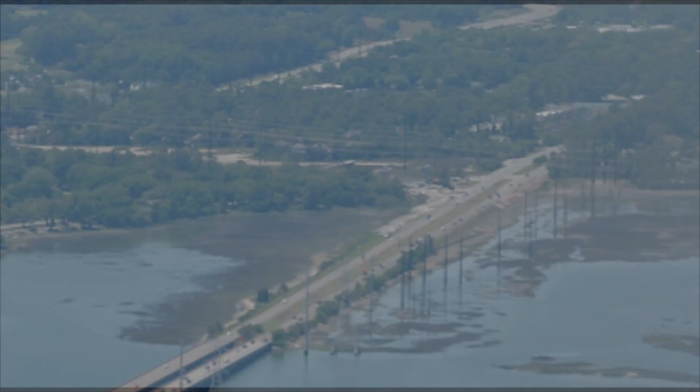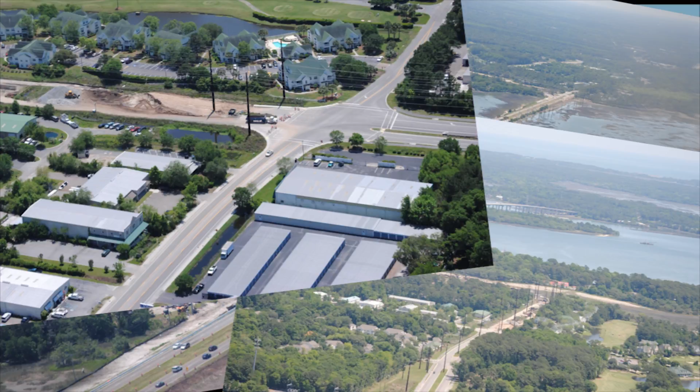After nearly 15 years and thousands of hours of planning and construction, the gateway to and from Hilton Head Island officially has a new look. The complex flyover bridge connecting Bluffton Parkway and Highway 278, accessible July 2016, could be classified as one of Beaufort County's most anticipated transportation improvements. The two goals in mind for everyone involved: safety and ease of access.

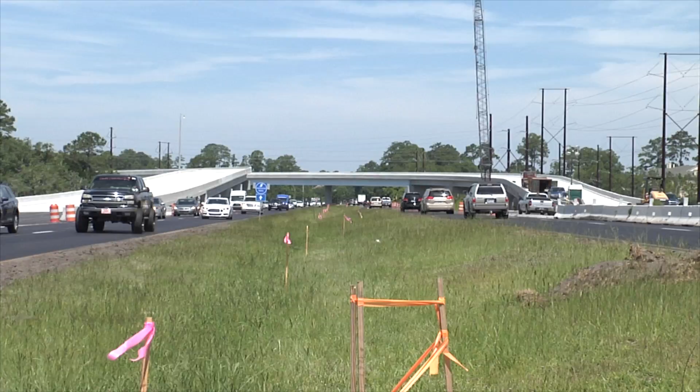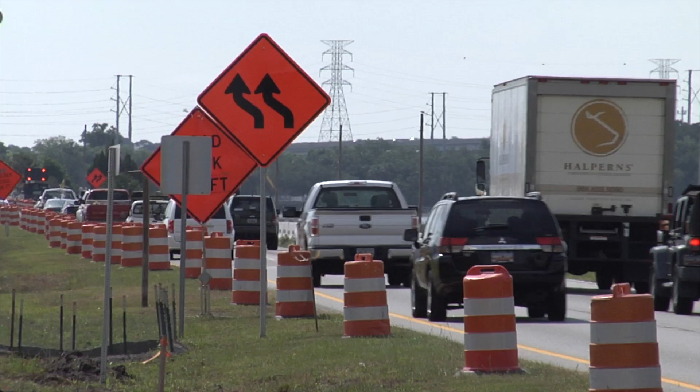It's been a long time coming. It's beneficial for the entire county because it is taking a lot of load off of 278. For the longest time, US 278 in this section of the corridor, anytime there was heavy congestion or a vehicle crash, traffic came to a stop. Every afternoon, traffic coming off Island backs up from the Moss Creek signal, and a lot of that traffic is wanting to turn left to get to the Bluffton Parkway. That congestion will all now be able to use Bluffton Parkway.

It's always exciting to see a big project finished. The traveling public sees construction on the roadway, the orange cone zones that everybody calls them. They see that for a couple of years, maybe 3 years. But really, there's just been maybe a decade or more of planning and studies and trying to line up funding. Funding that could not have happened without Beaufort County taxpayers.

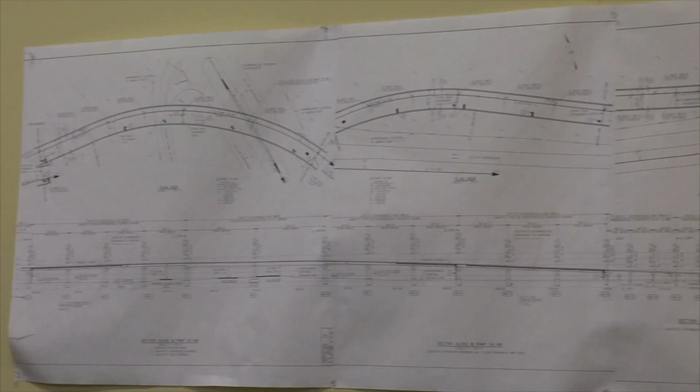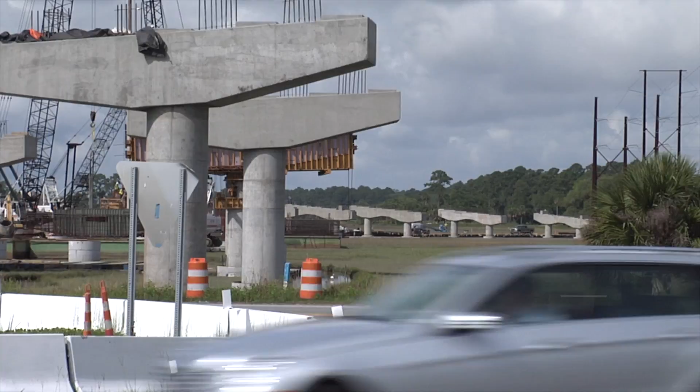A sales tax referendum was approved in 2006, setting aside $15 million for the project, which was later matched by the state and federal governments. We also put in road impact fees, and then there was some cost sharing on some additional asphalt repaving that we worked out with SCDOT. The sales tax referendum in 2006 really gave us the funding to be able to move the project into construction, into a viable project, and now we're looking at that completion.

You can debate the merits all day long, but the counties really have the ability to pass these sales tax programs. They have the ability to identify projects that are important to them, and they have the ability to make these projects a reality. It's the residents of the county taking their fate into their own hands to a certain degree.

The final contract value with R.R. Dawson Bridge Company is just over $38 million, about $7 million under the $45 million budget, and just shy of $1.5 million more than the original contract. The county plans to use the unused funds on other sales tax projects.

The project is a unique one as a whole, the first reason being the structure itself. The first thing that would come to mind or someone would see is the shape of the bridge. It actually looks like an S, if you will, from the air. A few bridges have single curves in them, but relatively few bridges have reverse curves in them, and so that makes it fairly unique.

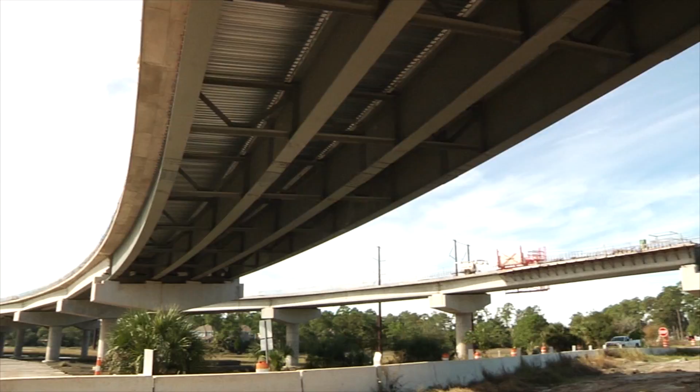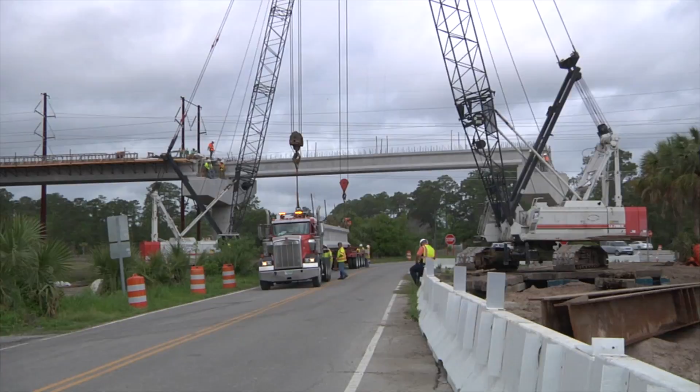There's 4 different kind of foundation systems on the bridge. There's 4 different substructures on the bridge, and then there's 3 different superstructures on the bridge. And when I say superstructure, I mean bridge deck, the riding surface. We initially knew that the goal was to extend the existing Bluffton Parkway and somehow tie it into US 278. As you're heading eastbound, coming off of a 5-lane road and then coming onto one continuous bridge structure, and then the term is bifurcating that bridge structure into the 2 ramps. Extremely difficult from a geotechnical as well as a bridge design standpoint.

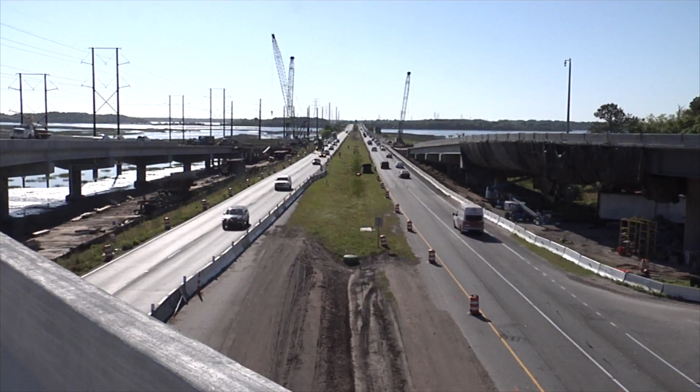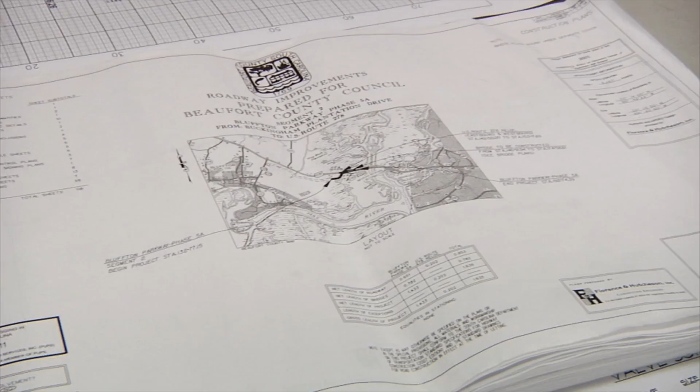It was also installed in an existing utility corridor, something that in the early stages posed a challenge to move the project along. Prior to construction, design teams came up with 4 different alignment blueprints, eventually choosing the one that you see today. It probably took between 2 and 2.5 years just to come to an agreement on exactly where the alignment would go and how Santee Cooper would relocate their utilities. Not only the Santee Cooper utilities, but all of the other adjacent type utilities, the water and the sewer and the phone that were all within Santee Cooper's easement. All those utilities had to be relocated prior to even going to construction.

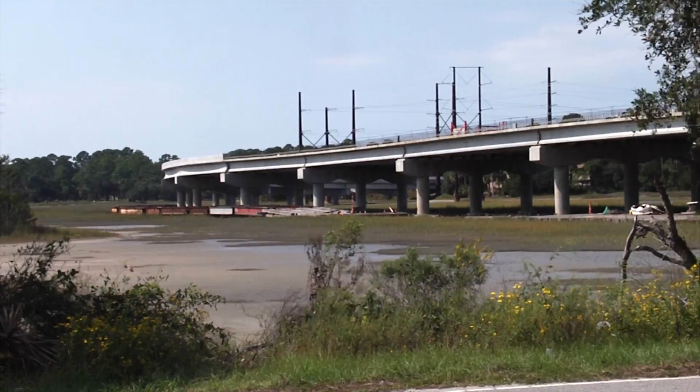But the biggest challenge of all was building through an infrastructure area critical to Beaufort County, the marsh. Because the marsh, because Port Royal Sound is so pristine, this is one of the most pristine wetlands in the state of South Carolina, and the oyster beds being really close. You've got to do a lot of things to protect the nature of the marsh, the nature of Port Royal Sound. You don't want a lot of contaminants, sedimentation getting into the marsh.

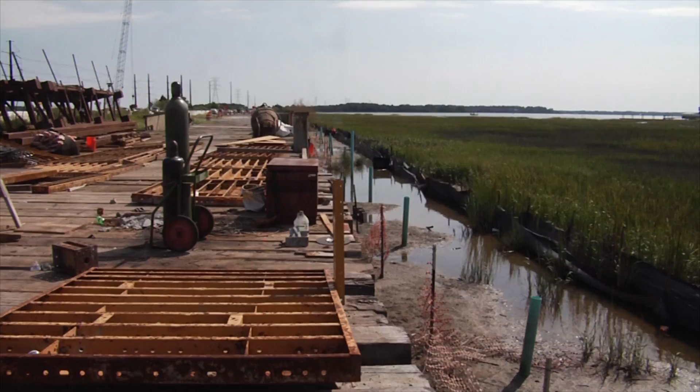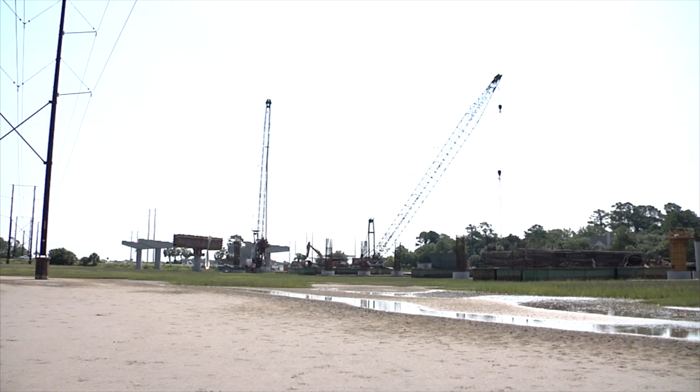The process started with studies of how a structure of this magnitude would impact the marsh. Project managers worked closely with the U.S. Army Corps of Engineers, Ocean and Coastal Resource Management, and South Carolina's Department of Health and Environmental Control to acquire a special permit allowing the bridge to come through the sound.

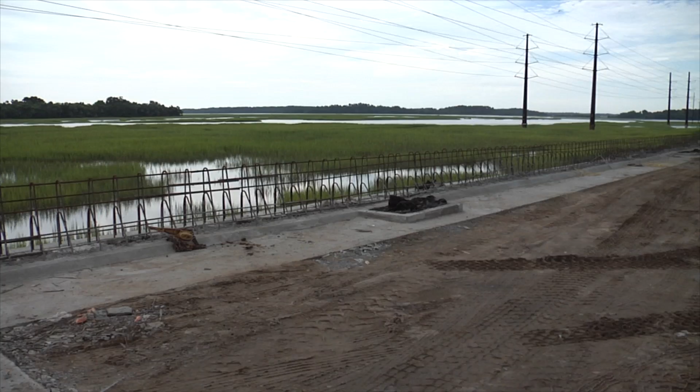One of the provisions in our environmental permit is the marsh grass that grows. We had to, if you will, check how many stems of grass grow in small areas before the project even started. And once the construction is complete, we've got to go and do the same thing for the next 2 years. And that's to make sure the grass regenerates itself where the structure does not stand, which was limited to help mitigate the impact on the environment.

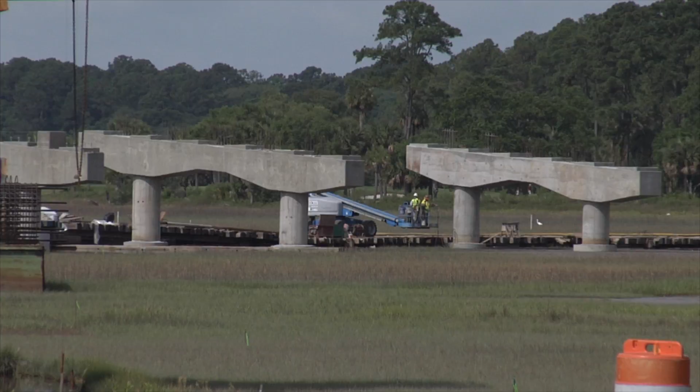When you look at the footprint of the bridge and what's actually touching the marsh, you see bents that are spaced very far apart. You only see 2 columns per bent, or maybe when you get into the ramps, there's only 1 column that comes down. We're using very small drilled shafts in lieu of some giant, huge spread footing that you may see in other locations.

The bridge also features a special stormwater filtration system. It's an industry standard, yet is not commonly used because not many new bridges are built over marshes. That was an innovative approach to this project, to capture the stormwater coming off of the bridge and essentially send it through a filtration system before the water would empty out into the marsh. And so periodically those filters will need to be cleaned, much like an air filter on a car.

Another neat aspect of the bridge is the coloring on the beams. The blue paint, approved by the Department of Transportation and County Council, will help prevent rust and erosion from the salty air.

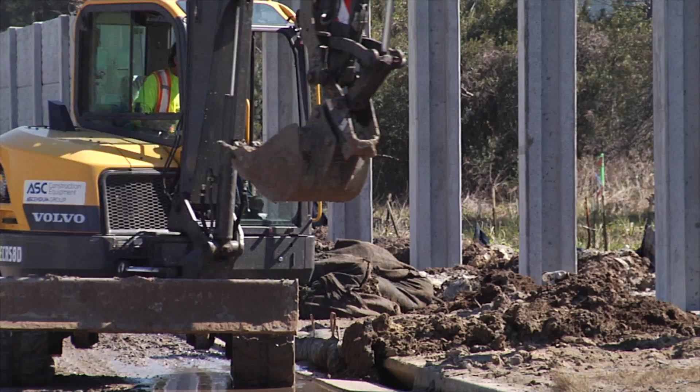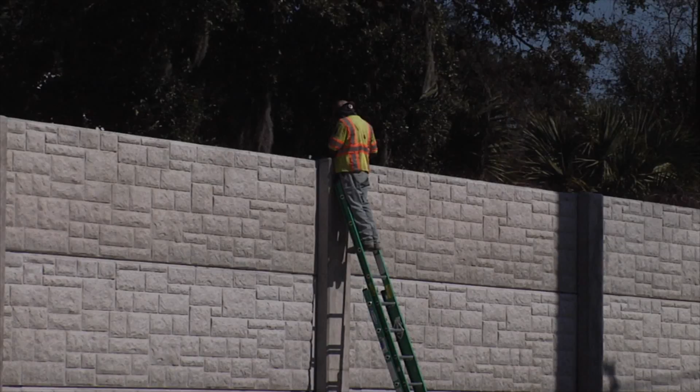Crews also erected 2 large sections of sound wall in late 2015, early 2016 on Bluffton Parkway near Buckingham Plantation Drive. During the design process, one of the things you have to do is you have to go out and check the level of the noise before construction starts.

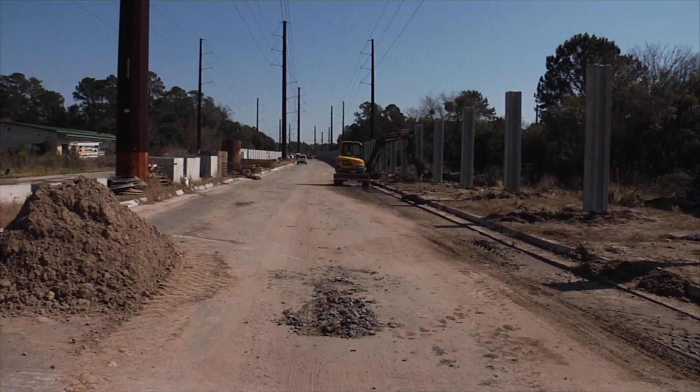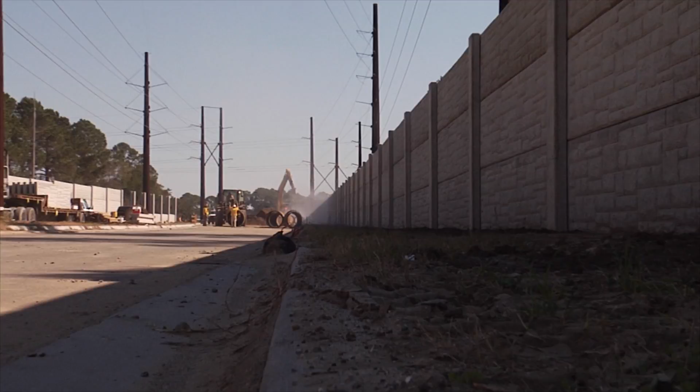With Old South apartments on one side and the Gatherings community on the other side, both of them were going to be impacted. The Old South was impacted the most, and so the noise wall on that side of the road was mandated by the federal government. You have to put that wall there to reduce the noise impact on the people who live there.

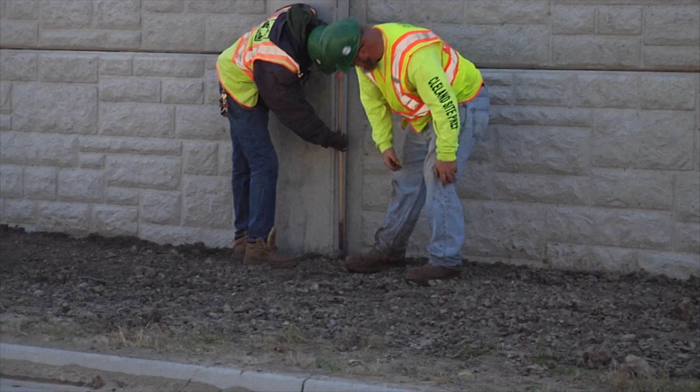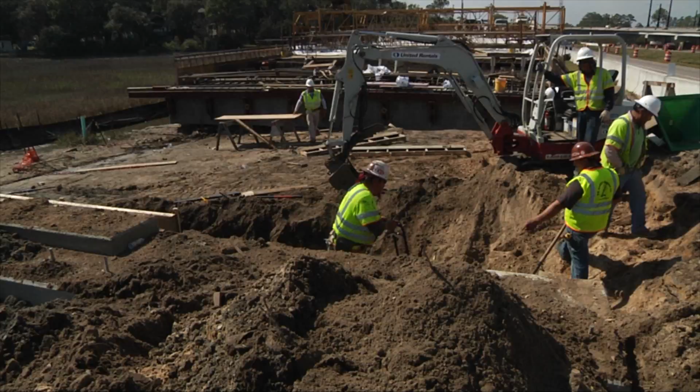And due to the pre-construction noise assessment on that stretch of new road, county leaders decided to put an adjacent wall to protect the Gatherings community from any traffic noise as well. By the numbers, the flyover wasn't short of large amounts. Crews moved about 36,000 cubic yards of earth. That equates to basically enough to fill 11 Olympic-sized swimming pools.

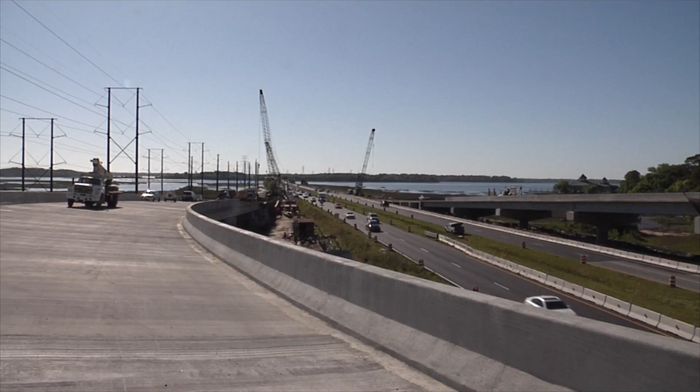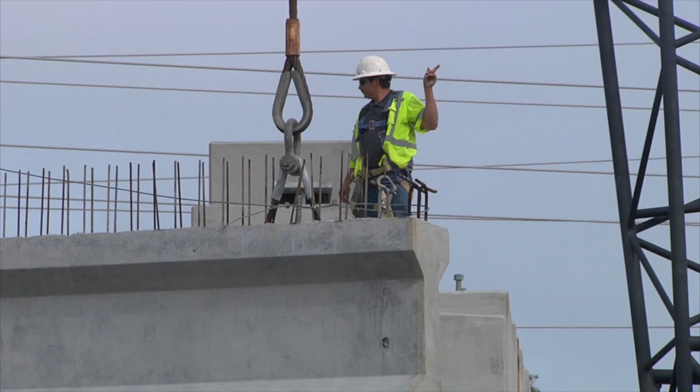They've also poured almost 11,000 cubic yards of concrete, equivalent to 2.2 million gallons of water, which could fill almost 3 Olympic-sized pools. For the bridge structure, about 6 million pounds of structural steel are installed over Highway 278, and more than 15,000 linear feet, or roughly 3 miles, of concrete beams hold the bridge up.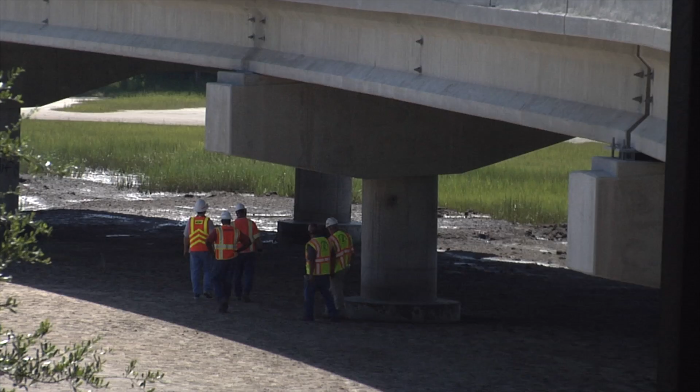When all is said and done, eyes still need to be kept on this new structure. Crews will perform what they call tactile inspections at a minimum of once every 2 years. You're looking for common problems first and foremost. Issues with joints and bearings, making sure that you're not seeing any distress that's occurring in the concrete or the steel. It is exposed to a saltwater, salt air environment, and so these things will eventually happen over time.

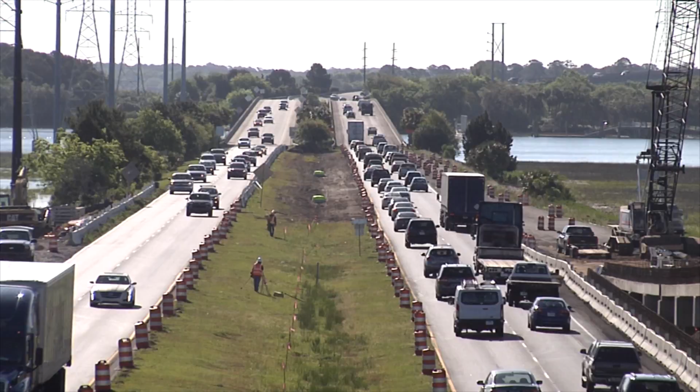Traffic flow will also be constantly monitored through the new roadway, where 20% of traffic from 278 is expected to shift to Bluffton Parkway before merging back into 278. We're coordinating some of that merge with operation of the traffic signals. And so what we intend to do is time the signal.

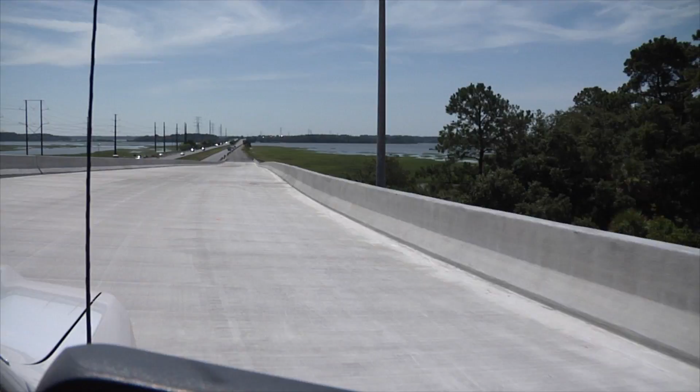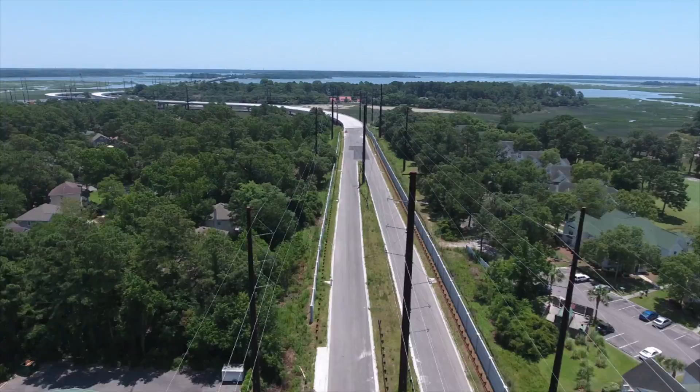We got a new signal at Buckingham Plantation Drive and Bluffton Parkway, and we're coordinating that time with the Moss Creek signal. So for the eastbound traffic, we will release traffic off Bluffton Parkway just after traffic gets stopped on 278. So they'll be able to merge right in and it won't be as difficult to merge.

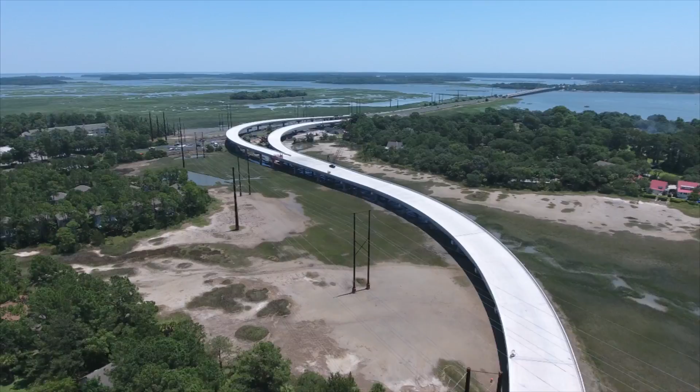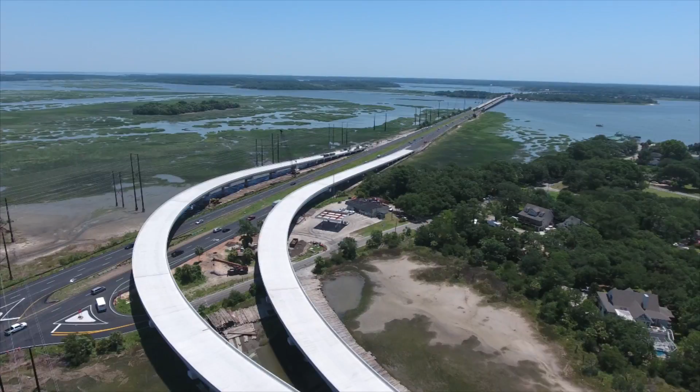County leaders say Bluffton Parkway 5A helps set Beaufort County up for future road improvement projects. That includes the idea to expand Bluffton Parkway from where it stops at SC 170 all the way to Interstate 95, as well as repair and replacement of both bridges onto Hilton Head Island. We're moving forward as fast as we can, but we always have to keep an eye on the future. Then the future, of course, is the bridges.

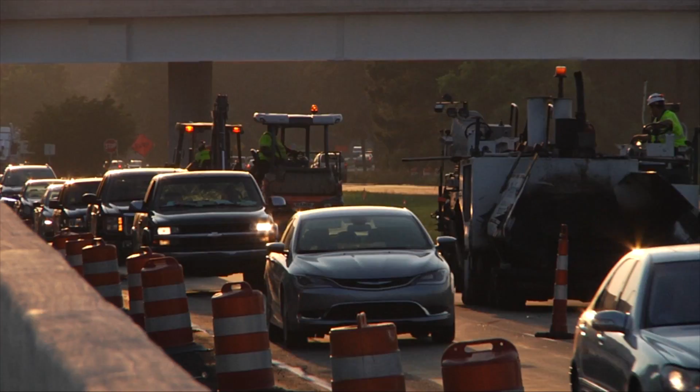Well, this ties into our long-term plans of getting 6 lanes on and off of Hilton Head Island. So this is just one more step in that, and one more piece in that puzzle. Coming up in November, we've got a sales tax referendum, which includes 3 more projects involving US 278.

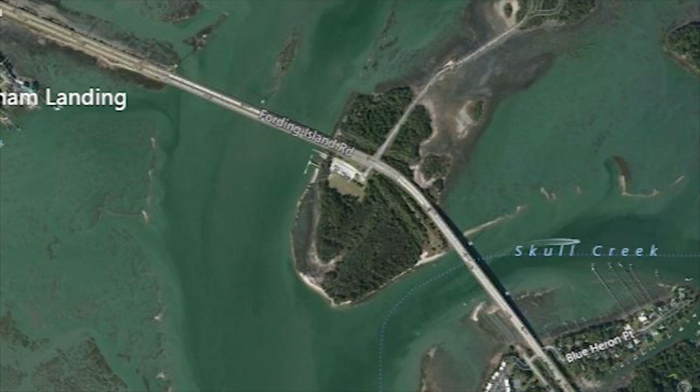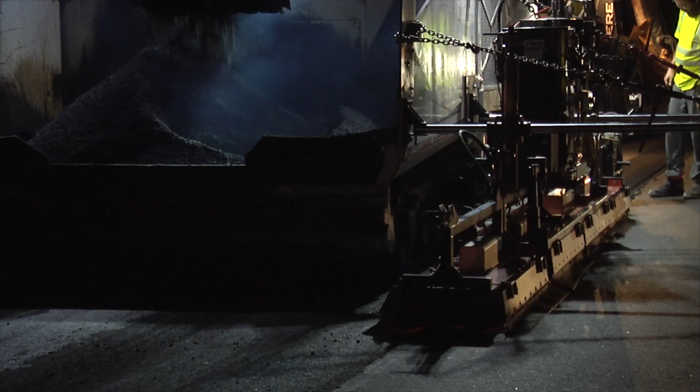One of them is going to be improving the access on and off of Pinckney Island. The other is going to be improving access and widening on Jenkins Island. And then the third project is widening 278 from Jenkins Island to Squire Pope Road. And with the completion of this project comes joy in strengthened relationships from all parties involved. This project even further reinforced the relationship with Beaufort County officials.

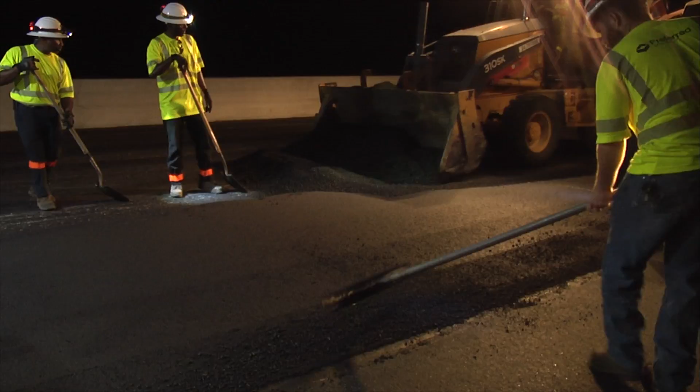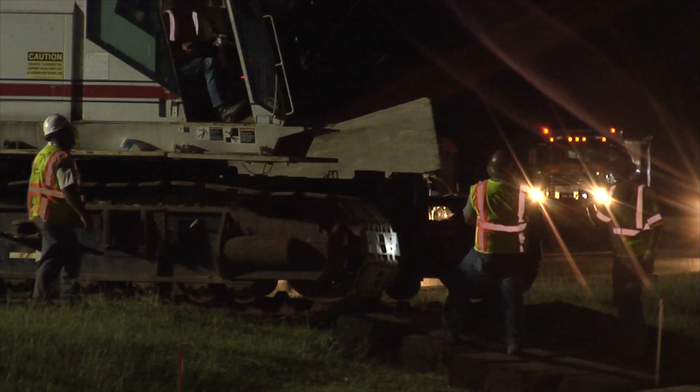The folks here really take their job seriously, and they're really concerned about doing good for the people who live in Beaufort County. It's very rewarding at times, it's very challenging at times. The county's doing a lot of major infrastructure projects, and they have been for a lot of years now. They are doing projects and delivering things to make transportation better in their county, and we're very appreciative for it, and we love what they're doing down there.

It's a signature project for a number of individuals and agencies, both the county and the DOT. This is going to be a great project for the DOT, although it'll be a Beaufort County project. It'll benefit the DOT. Personally, I take a great amount of satisfaction in seeing a project that we submitted about 10 years ago finally come to fruition and be completed.

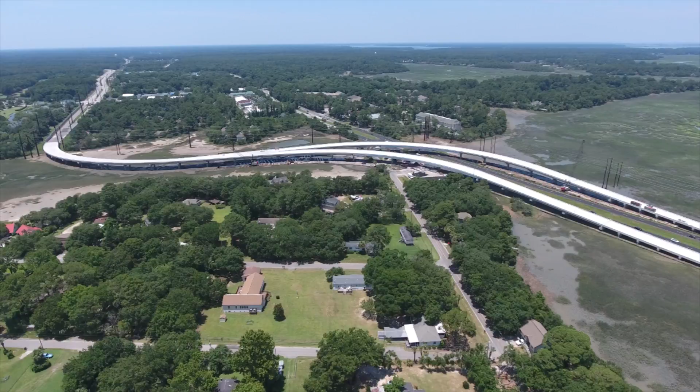But we're excited. I'm excited, and I think folks are going to see that it's going to make it a lot easier to get on and off the island from certain areas, and I think they'll appreciate the benefit of it. It's a relief to finally get a load off the shoulders on this one and get it finally done. After 15 years of work on it, glad to see it finally built out.